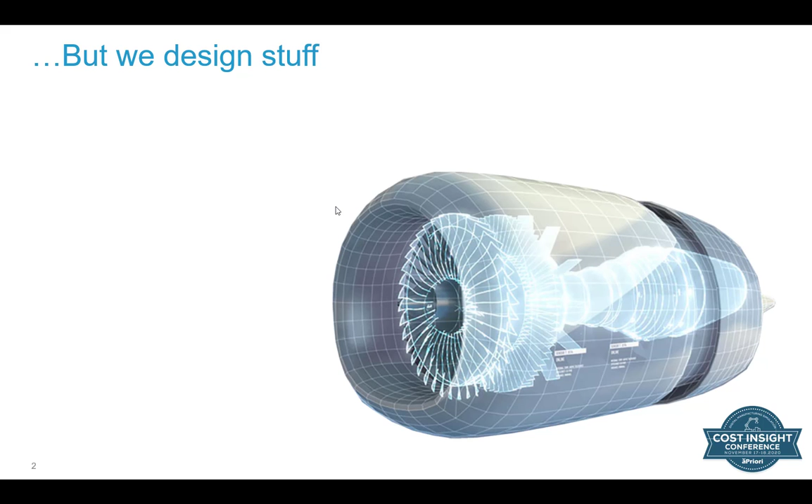This product here, for example, needs to perform to its specification, needs to be efficient, needs to be green and lean, needs to provide enough power and thrust, but most importantly, it needs to be safe. Its primary function is to keep that aircraft in the sky, and cost becomes a close second, but is increasingly more important for organizations that develop products.

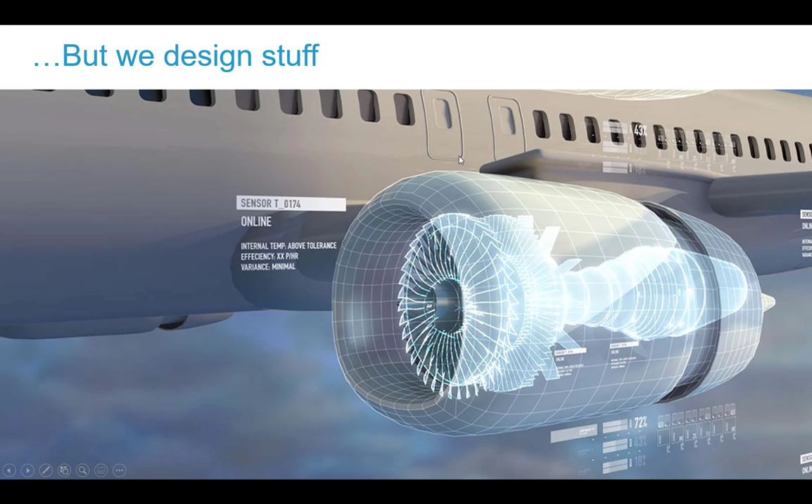These pressures around cost come from different areas. Traditionally, they've come from finance, procurement, or even program management, where the program manager needs to ensure that product is meeting its budget constraints and is being brought to market on time. But pressure is also coming from the world of value engineering, from the competition and the shareholders. The marketplace is creating pressures on the design teams to focus on cost early on.

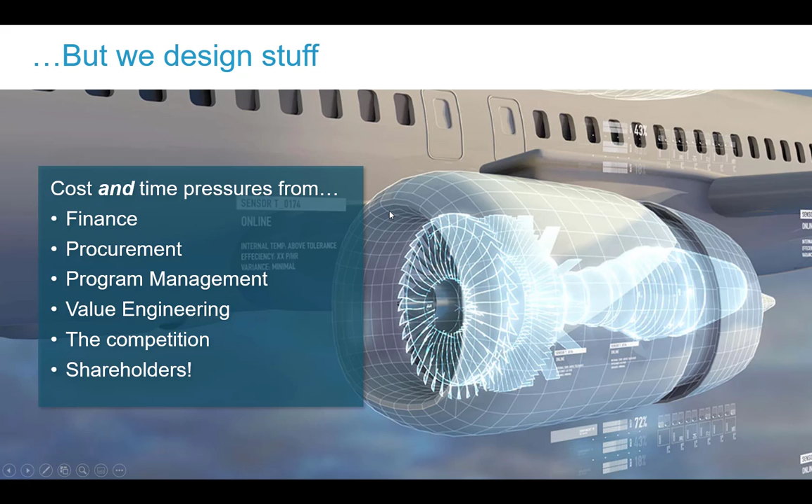Of course, we cannot afford to compromise the most important thing, and that's meeting the requirements of the design, especially if safety is a big factor. But we can focus on cost and focus on innovation at the same time. In fact, if we do, it helps our innovation challenge.

If we think about the progress of developing the digital twin, the definition of our product, if we don't define it right or we get things wrong, we end up with lots of unnecessary change at the end because of design to cost or manufacturability errors. And making changes at this end of the life cycle is very time consuming and difficult. We'd rather incorporate it early on and avoid this late stage change.

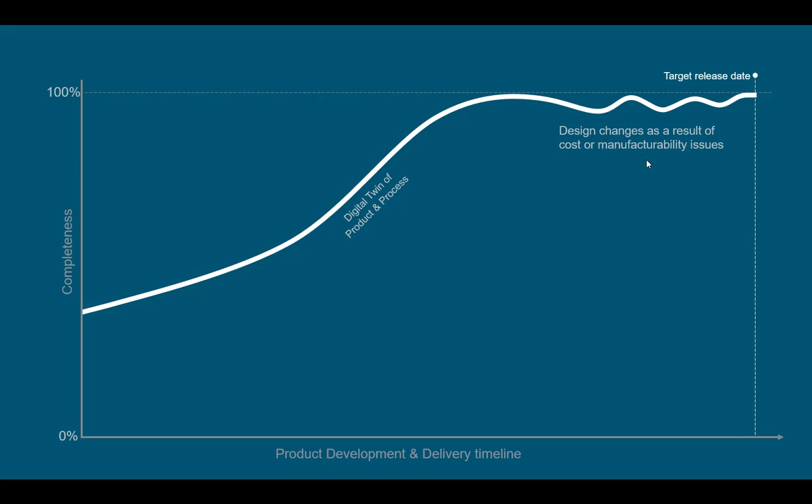So we would like to focus on cost and manufacturability early on so we can eliminate that late stage change, and that actually releases more time for engineers to focus on what they do best, innovation, and doing it with a finite amount of resources in the business to create the best products but that are affordable and right for the business.

Over the period of that life cycle, the ability to influence cost goes in the opposite direction, and that's why aPriori uses the digital twin to simulate manufacture to understand where these issues may lie during the design phase.

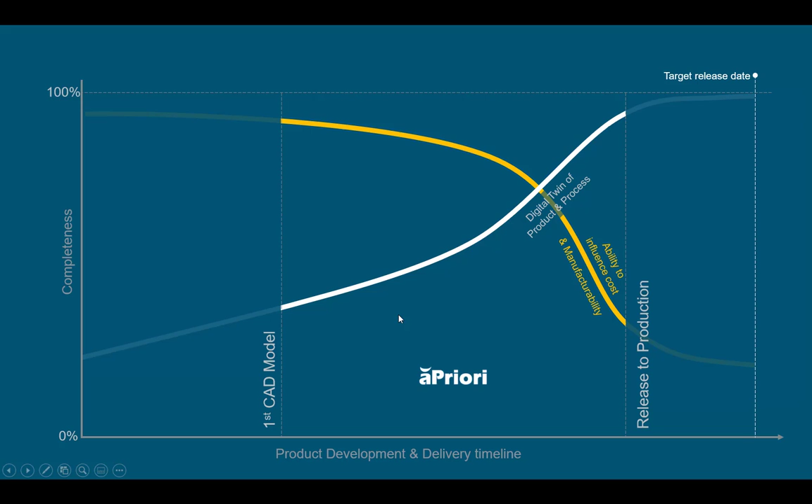So how does aPriori support the engineer then? Well, first of all, we're going to do this without intruding too much on the engineer's primary role. Therefore, we're going to use aPriori's Cost Insight Generate. And Cost Insight Generate does a simulation in the background and produces reports.

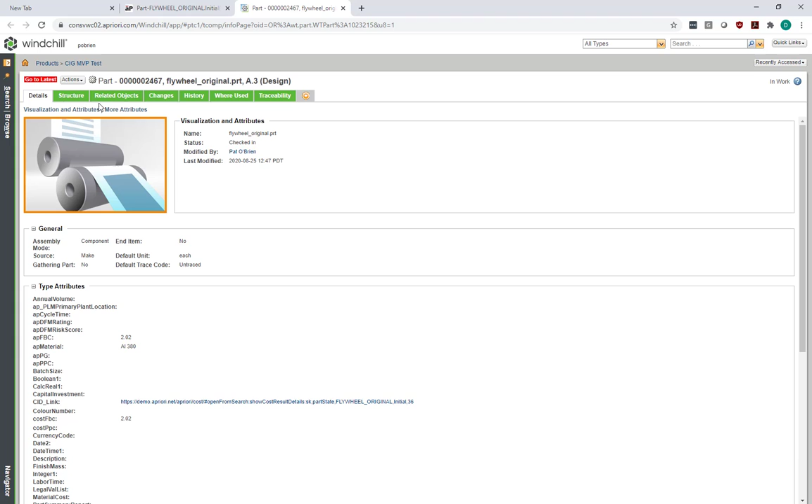Within the email is a link to the definition of that part. It takes me to my PLM system where it is controlled and managed. And with that part inside PLM, there's documentation that is used to specify it throughout its life cycle.

Here, for example, is the report that was generated by aPriori Cost Insight Generate. And in this report is the assumptions that were made during the simulation and also the issues themselves. These are the things that are going to make it slightly harder to manufacture and therefore impact cost. And I'm being informed of these early on in the process, so I now have the opportunity to do something about it.

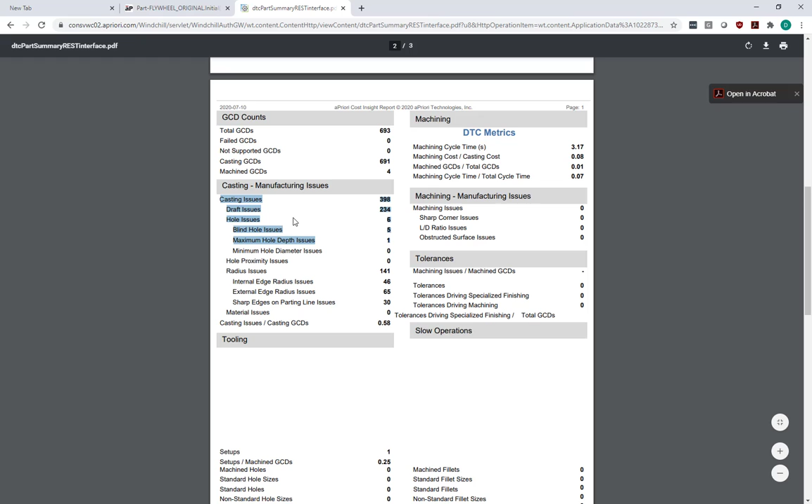But what's really important is, how do I actually solve those issues? What are they? So also attached to the part is the simulation itself. This is a simulation that was performed by aPriori on my behalf in the background, and now as a design engineer, all I need to do is read through the series of issues and understand if I can accommodate them in the design without compromising design quality.

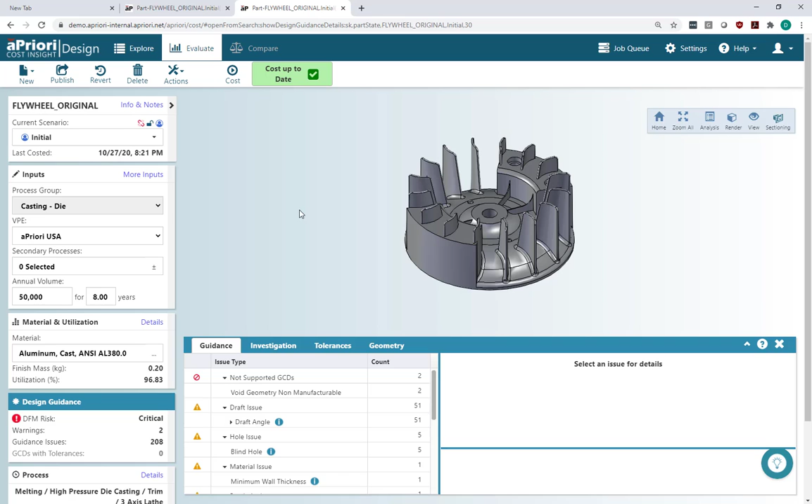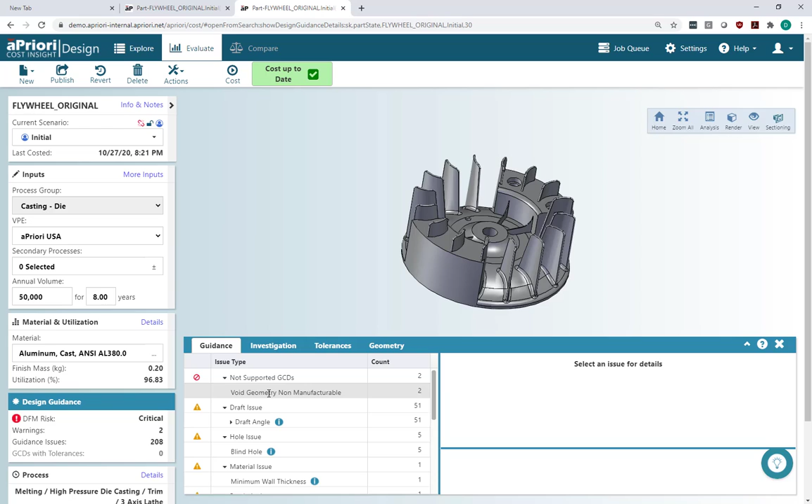This is a flywheel. It sits within a drive system of a drill, and that flywheel has two functions. One is to provide rotating mass to retain inertia, and the other function is to provide cooling for the motor which it is driven by. So I've elected to design it with large counterweights and some fins. And then I've got some structure to hold it all together as a single die casting part, as you can see over here. Now, down below here is a series of issues I need to now look at and consider.

The first one here is void geometry. I've designed voids into this component, which are not possible to make in a traditional die casting tool. And therefore, I need to know about this now, because I could send this off to the supplier. They could go to the tool maker, they could have a discussion about whether this is really required, come back to me a few days or even weeks later and have a discussion on email that could just delay the whole process of getting the first component made.

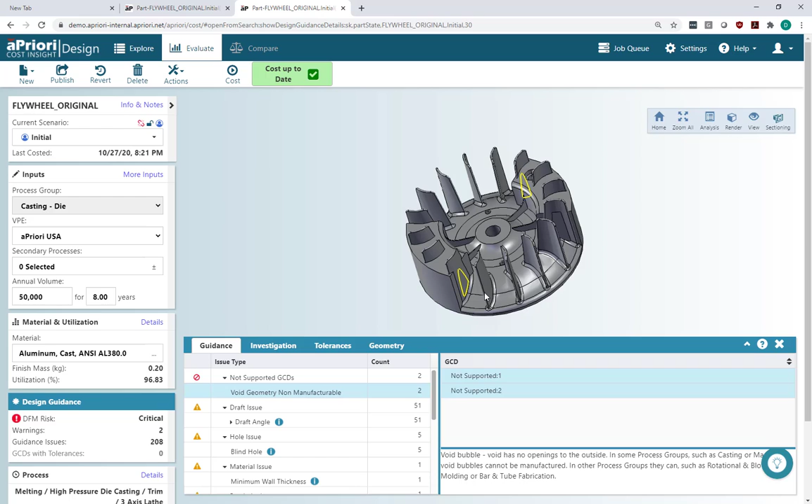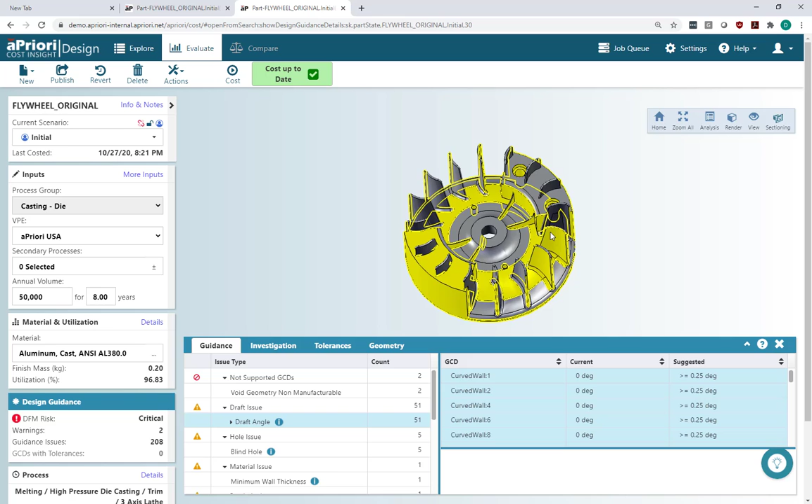I also have issues around draft angle. If I don't consider draft angle in the design and these yellow surfaces don't have enough draft based on the requirements for manufacture, I could send this to the supplier and take a few days or weeks discussing the assumptions, or I could leave it entirely up to the tool maker and get a compromised design because they've made assumptions I should have been involved in. Either way, it leads to quality issues, yield issues, or delays in production.

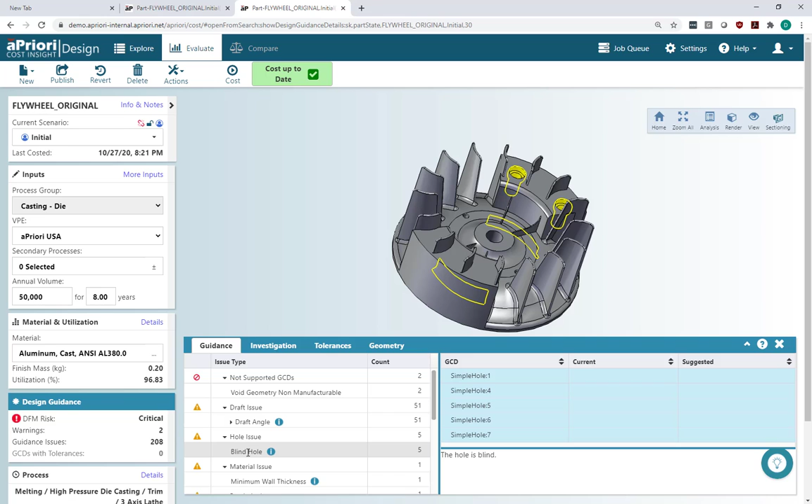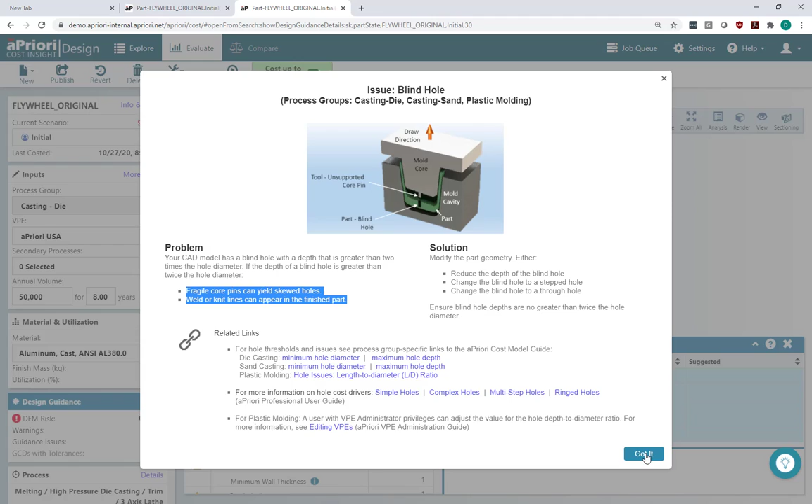There are some blind holes in this component. Blind holes are fine, I designed them in because that's what I wanted. If I want to understand why they're flagged as an issue, aPriori gives me more information. For blind holes, I need pins in the tool, and small pins can be fragile, delicate, they can bend and skew, and cost more money to develop the tool with. If I used a through hole instead, the pin would be supported at either end, giving a better casting and perhaps a cheaper tool to manufacture and maintain. So it's suggesting that hole could be a through hole, cast in and tapped later in the machining process.

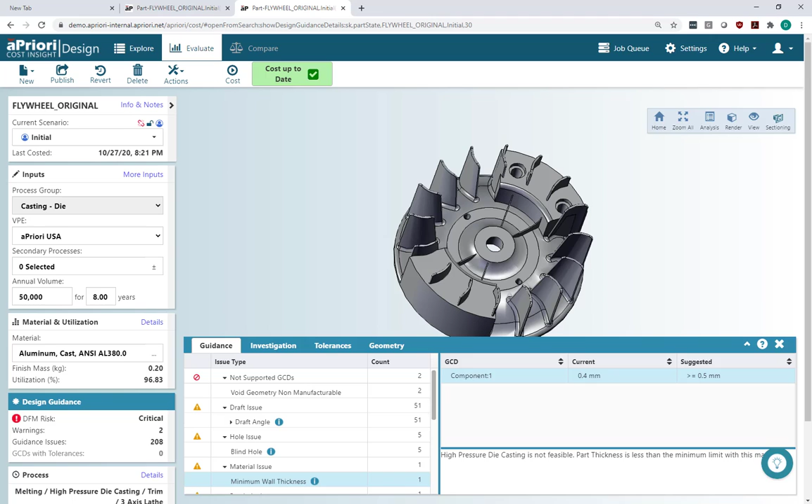It also tells me where I've violated rules around minimum or maximum wall thickness in castings. Here my minimum wall thickness is 0.4 millimeters, and the minimum suggested is 0.5 millimeters. If I want to understand where these thin and thick walls reside, aPriori can show me precisely where they are in the model, and I can use tools within aPriori to investigate further if needed.

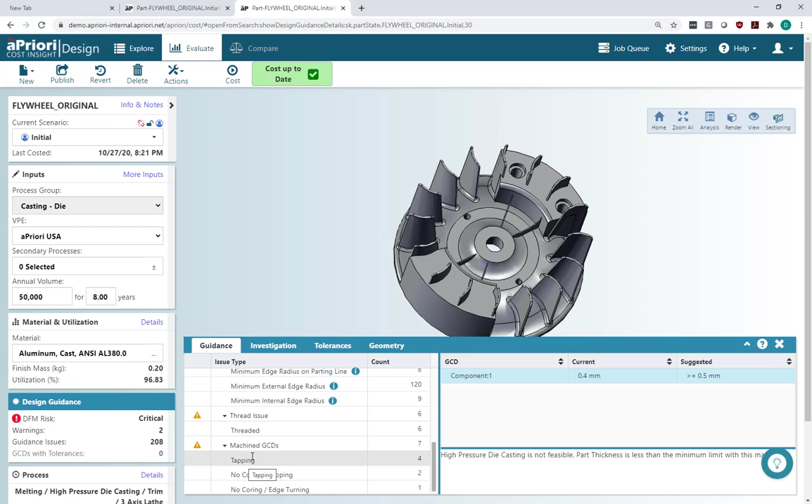Also in this list of issues there are things around minimum edge radius and so on. It shows me all the features that are going to be created by machining operations, dependent on manufacturing feasibility and tolerances. So if a hole cannot be cast to the right size or tolerance, it will be machined, and aPriori knows this and works out what needs to be machined. Here's a list of the process elements required to make it. Machining represents nearly 11% of the total cost of the part, so if I want to take that 11% out, I could redesign this to avoid machining operations and save a significant amount of money.

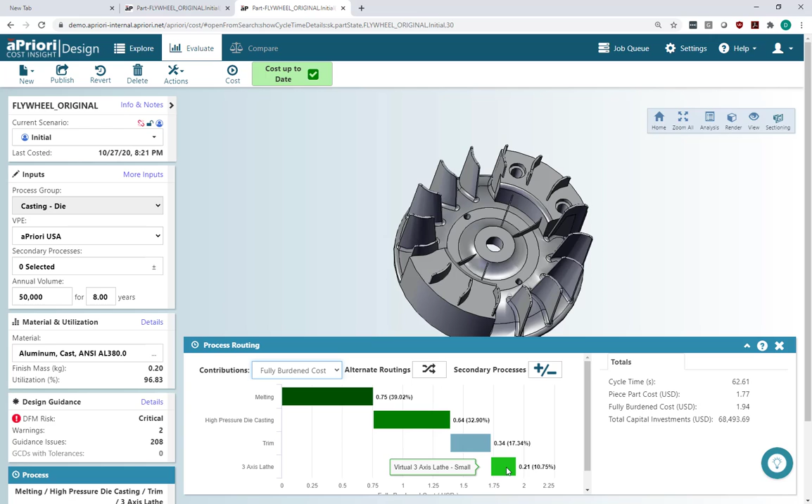Given this guidance, I need to rethink the design and accommodate the input into my new version. So I've gone and done that in my CAD tool, this is Creo I'm using for CAD design, and I've designed my new component. Now I need to understand if it's going to be a better component from a cost perspective, so I send it up to aPriori's cloud to get it evaluated.

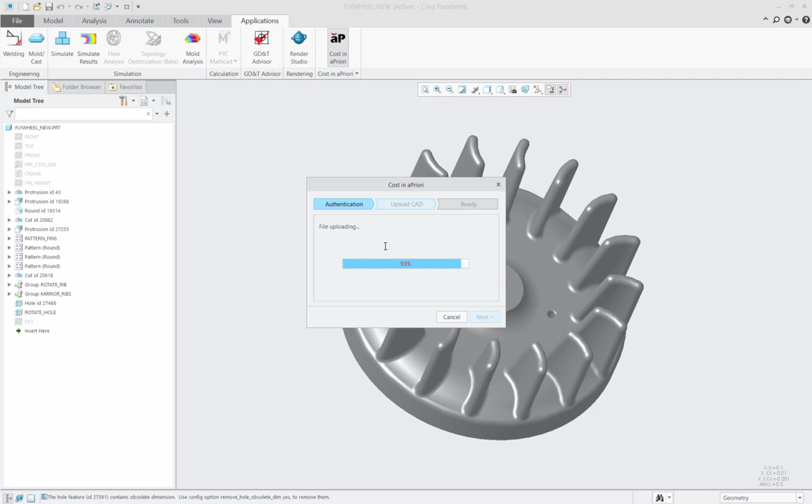All that's happening here is uploading the CAD model to our secure cloud environment where the simulation takes place. The simulation takes only a few seconds or minutes, which is great because it would normally take days or weeks. While it's processing, it translates the geometry and runs it through a manufacturing process in a digital factory, coming back within seconds with an answer. From a designer's perspective, I get on with designing world-class products and let aPriori do the simulation and identify where the challenges will be.

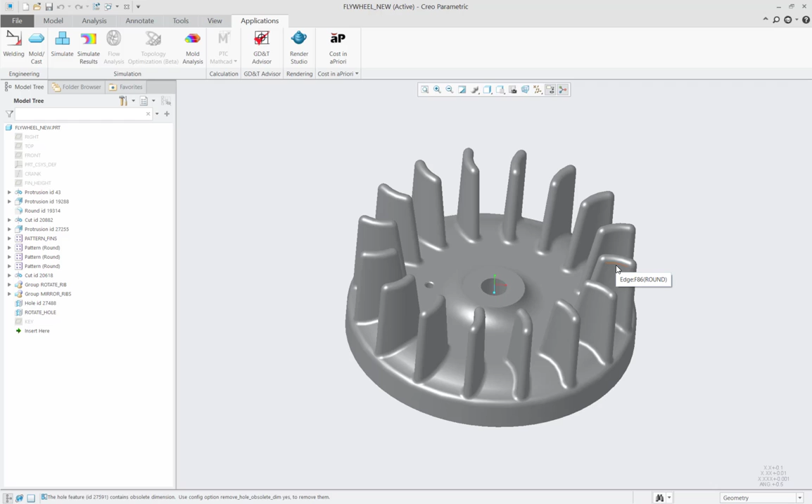What I've done with this design is removed the counterweights, and instead of having the counterweight rotating mass, I've put the mass into the fins that do the cooling operation. So I've got all the rotating mass on the outside in the fins, but not in big lumps of material which take up cycle time in the tool because they take longer to cool. I don't have the thin fins I was using to support them, it's a simpler design. In fact, I've accommodated a 2-for-1, thinking about manufacturability and design at the same time. The fins now provide two functions in one single feature, which is good from all sorts of perspectives.

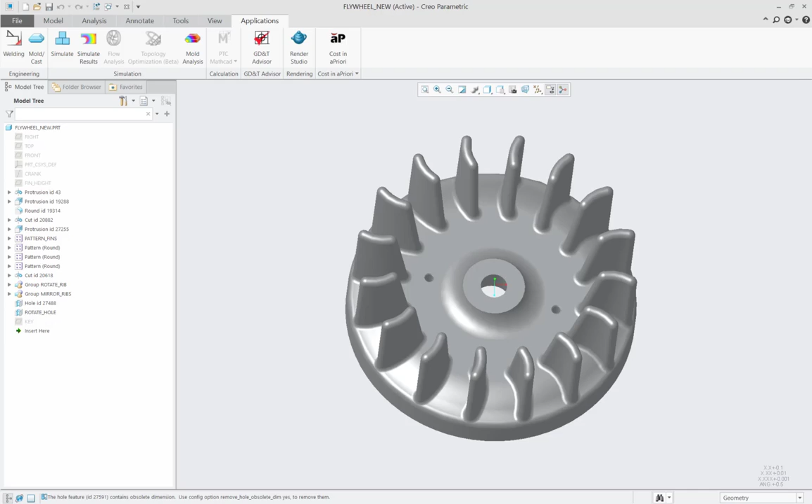So once it's finished the simulation, it gives me a result. Here's the new design. The result suggests the cost has now gone down to $1.66, so it's a much cheaper component to manufacture.

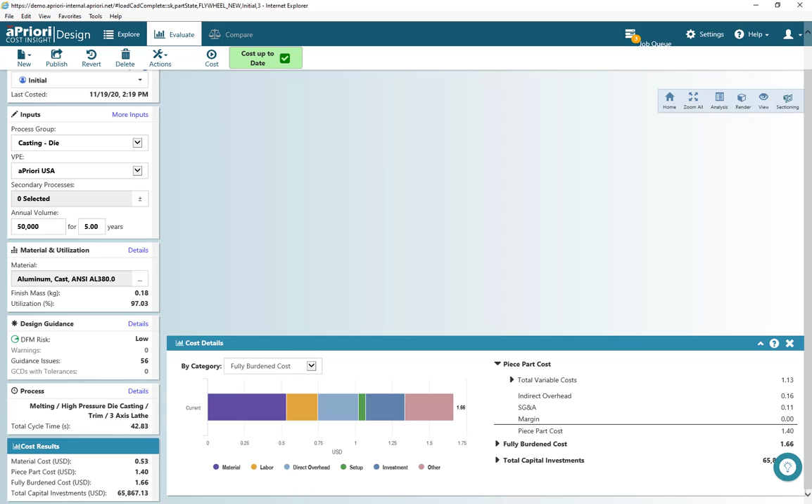How much cheaper is it compared to the old one? Well, within aPriori I can run comparisons very easily to compare one design to the other, looking at them side by side. The direction and colours of the arrows suggest changes in the different factors. I can see it's gone from a critical state of design for manufacturability to low risk, and the overall cost has gone from 194 down to 166. That saving over the life of the part represents about $100,000, just for one simple piece of advice that aPriori gave me, and I've done this within a few minutes with minimal interaction with the simulation itself, just taking advice and using it to alter the design.

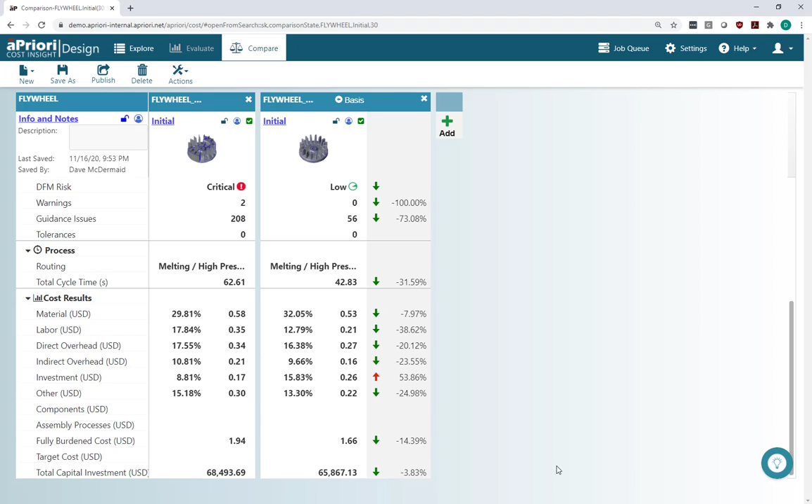And that's how aPriori supports design engineers. It provides guidance when it needs to be given. Cost Insight Generate is the place where the simulation is performed automatically and managed within our product lifecycle management tool, in this case Windchill.